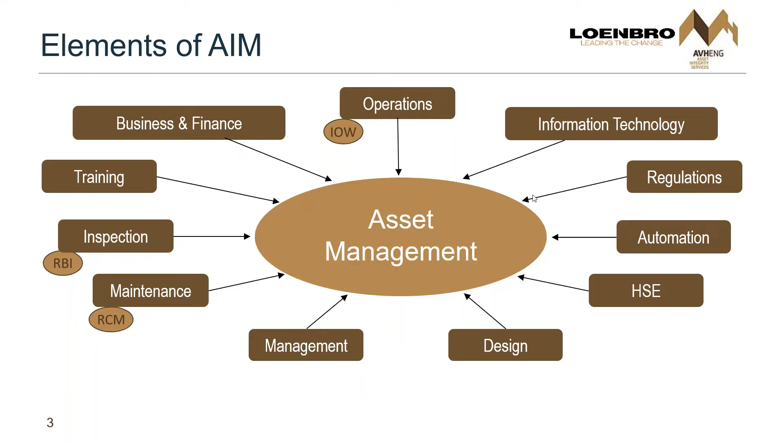What is it? RBI is a documented methodology, a thought process that factors risk into inspection and maintenance decision making. It's a hybrid technique which combines the disciplines of risk analysis and mechanical integrity. Typically in the industry, it only covers the breach of pressure containing hardware.

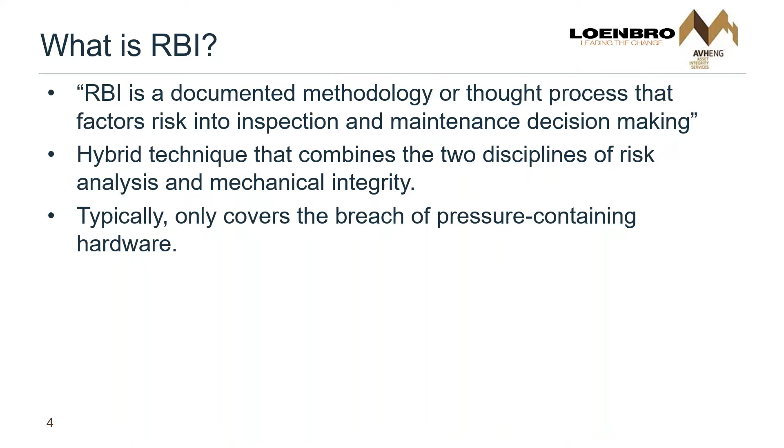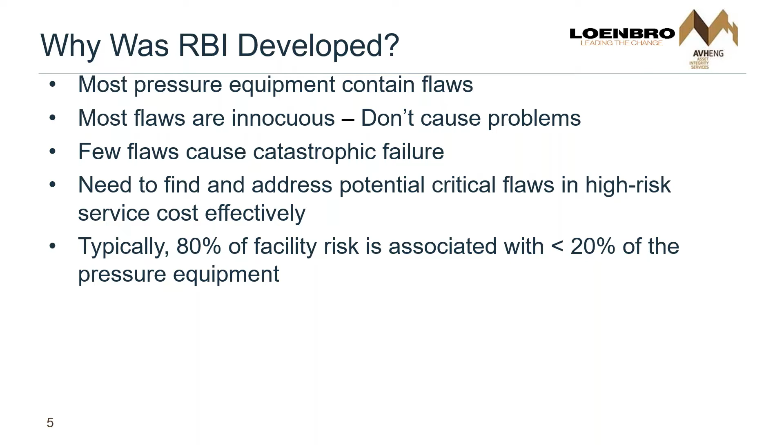Why was it developed? Most pressure equipment contains flaws, and those flaws don't cause problems. Most of them don't, but a few of them do, and can cause catastrophic failure. So the idea was to find and address potential critical flaws in high-risk service cost-effectively through a repeatable methodology. That's why RBI was developed. And as a matter of fact, if we look at a facility, a lot of times 80% of facility risk is associated with only 20% of the pressure equipment. So this allows us to concentrate on that 20%.

What are the typical objectives? Avoidance of catastrophic failure, getting a safer plant. Being able to attain longer intervals between internal inspections while maintaining the same level of risk. Focusing resources and effective use of inspection and maintenance personnel, documenting the methodology for factoring risks into inspection, and it's a proactive application of new technologies and allows for that.

That fourth bullet point is very important, primarily when one is going through a sustainment program, or if there's ever any kind of investigation of a fault or something like that. It's documented how the decisions were made to do, how often to do inspections, and so on.

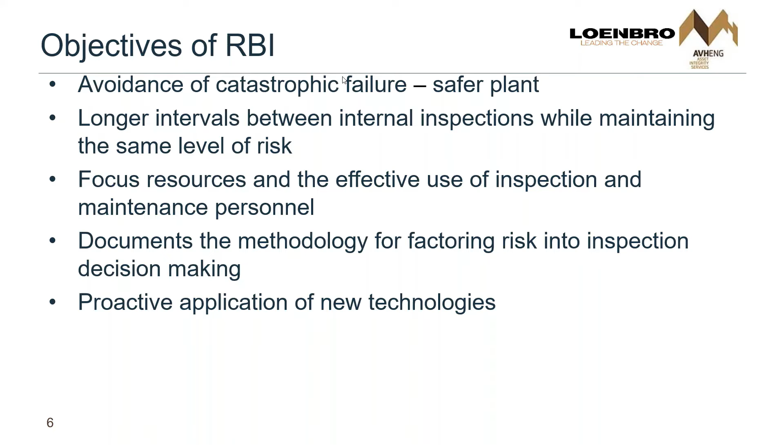There are three basic questions that are considered when establishing the basis for defining risk. They are: what can go wrong? How often might it happen, a likelihood, and what are the effects, the consequences?

A fairly easy understanding is risk is the combination of frequency of some event and the consequence of that event. So when we look at COVID risk, it's what is the frequency of being exposed, and what are the consequences. Or what's the risk in flying - it's the probability of the aircraft coming out of the air somehow, and we all know what the consequences are.

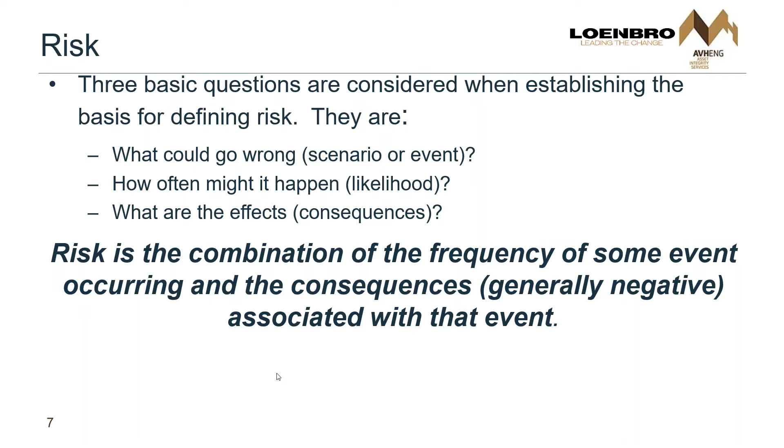Typical RBI implementation process: first of all, we have the preparation phase - determining our goals and objectives, assembling resources, determining our approach, and determining the scope. The next thing we go into is analysis,

or assessment, when we collect the data and determine the consequence of failure, likelihood of failure - that's what COF and LOF stand for - and do the risk ranking.

And then finally, we go into an implementation phase, which is basically taking the results from the assessment and developing inspection plans, or developing integrity operating windows, and maybe developing corrosion control documents, or CCDs.

There's also this other piece, but primarily that's a matter of if, after the risk assessment, it's found that the risk is too high to meet corporate requirements, then other changes may be required. In other words, some systems may have to be operated differently, or a design change may have to be implemented to keep that risk within acceptable levels, because inspection won't take care of it.

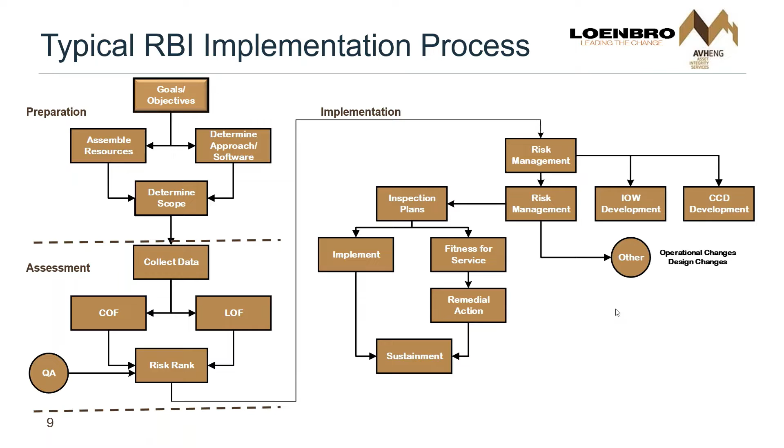Finally, the development of inspection plans: if there are no issues, you can go right ahead and implement it. If we find that there are some items that are way too high, or off the chart, we undertake a fitness for service and take remedial action. Then those plans need to be sustained by regularly updating your RBI process through the management of change.

Preparation phase. Goals and objectives - this goes through why are we doing it?

What knowledge is required? Who will be on the RBI team? What are the roles? Who's responsible and accountable for what? What facilities, assets, and components will be included? What approach, methodology, or software will be used?

What data are to be used? When will the assessment be completed? How long will the assessment be in effect, and when will it be updated? How will the results be used? What benefits will be derived from the program? So basically, when you're setting up a program, a lot of these need to be addressed, and some of these will be covered as we go forward.

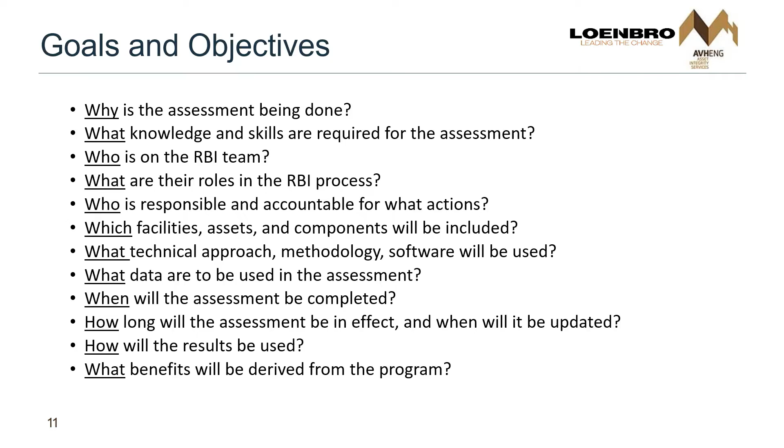Types of risk analysis - we've got a Level 1, which is basic. This is primarily in the oil and gas, chemical environment. Level 1, qualitative risk analysis, simple, brief prioritization of equipment.

You may easily use a spreadsheet with qualitative questions and rate items high, low, medium, what have you. This is usually developed by a group of corrosion engineers, process engineers, and inspectors to take a look at that.

Level 2 is a semi-quantitative risk analysis. It's more detailed in prioritization and planning. There's a way to rank things within there using subject matter experts - those with maybe 10 to 15 years experience working at plants who can understand damage mechanisms and contaminants that may be involved in process streams and so on and so forth.

And then finally, there's a quantitative risk analysis - basically in-depth analysis. This is typically implemented through software that provides for using the detail of the API RP 581 methodology.

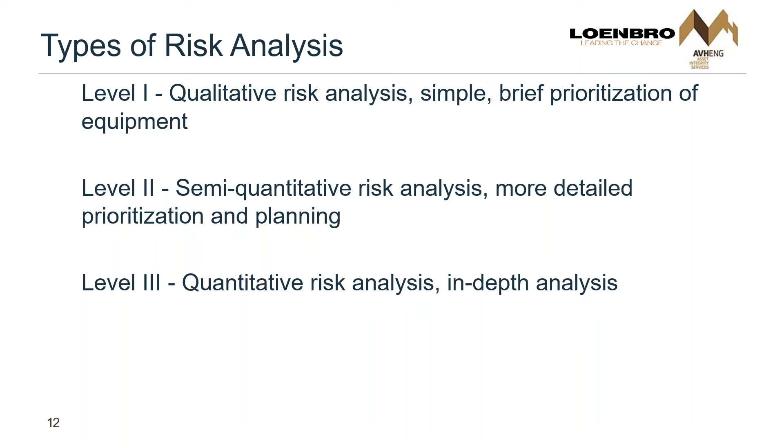Which one would we recommend that you use, or do you want to decide to use? We understand, perform the minimum level of analysis necessary to provide information adequate for decision making. If I'm looking at one or two pieces of equipment, a very small type of thing, qualitative will probably be more than sufficient.

But if you're going to do a detailed analysis, you're going to need software, etc., so you can get repeatable results. Detailed analysis, when not necessary, doesn't benefit the decision maker, but may inappropriately use resources which could have been spent reducing the risk. Also want to point out, accuracy and precision are not the same thing.

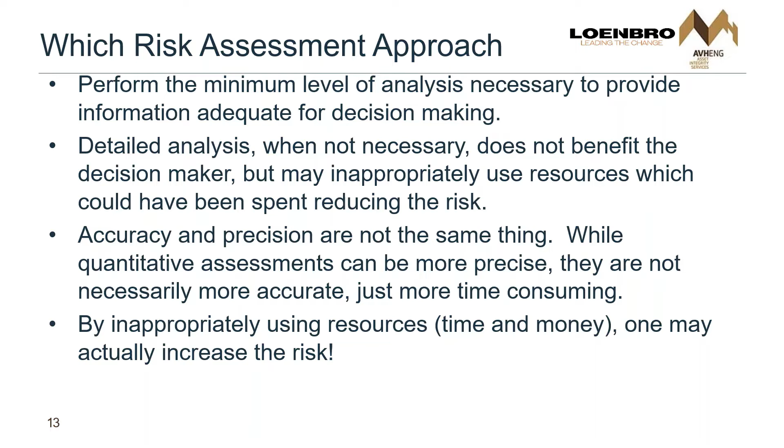While quantitative assessment can be more precise—I may find my probability of failure out to the second or third decimal place—I'll show you in a minute or two why it doesn't matter. Also, precisely defining the area your consequence is going to cover doesn't mean you need to be more precise. You can be accurate without being precise. By inappropriately using resources, time and money, you can actually increase the risk because you're taking away resources that could be used to manage the risk once it's done.

The approach in semi-quantitative analysis is basically to use weighted ranking factors for relative ranking centered on equipment and process-specific conditions. The quality of the data is taken into account. Component data are benchmarked and qualified, and the basis for all decisions is documented. I want to point out that's very important.

While the API 581 approaches take that into account, they also use generic industry data as a starting point in terms of probability of failure, and provide another piece of evidence to assist with the risk ranking. As you can see, we tend to favor the semi-quantitative approach.

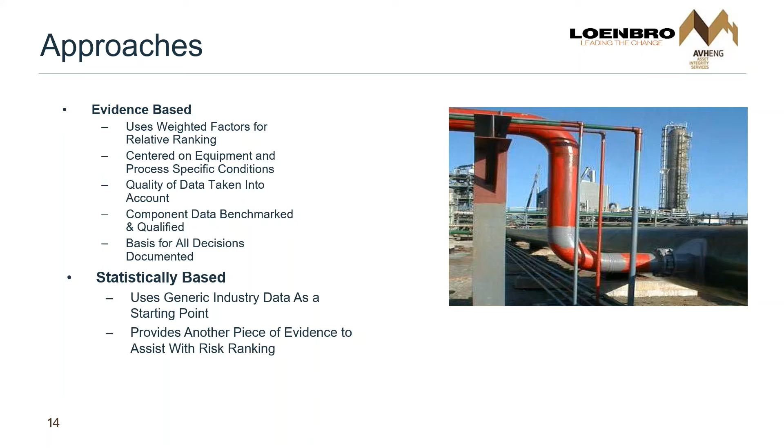The RBI software consideration: are you going to have the software be the IM program, or does it support the IM program? We certainly recommend that it support the IM program. There may be things within the software that don't address everything you need.

What are the requirements? You need to develop your requirements of what you want to do—quantitative, semi-quantitative, or qualitative? Do you want to include inspection planning and management? Is it going to be integrated with other tools such as SAP or other scheduling programs, your CMMS? What are the corporate IT requirements? Sometimes that can be, I'm probably speaking out of school, a pain in the neck. Also, what kind of training are you going to need to obtain?

Should you, as an owner user, obtain a license or have the vendor provide it? There are cost considerations when it comes to that. We always suggest that the owner user obtain a license, to keep being able to support it after the initial RBI is accomplished, in terms of sustainment. The other thing that can affect your license cost is to try to avoid bells and whistles—there's a lot of RBI software out there that has a lot more than you need.

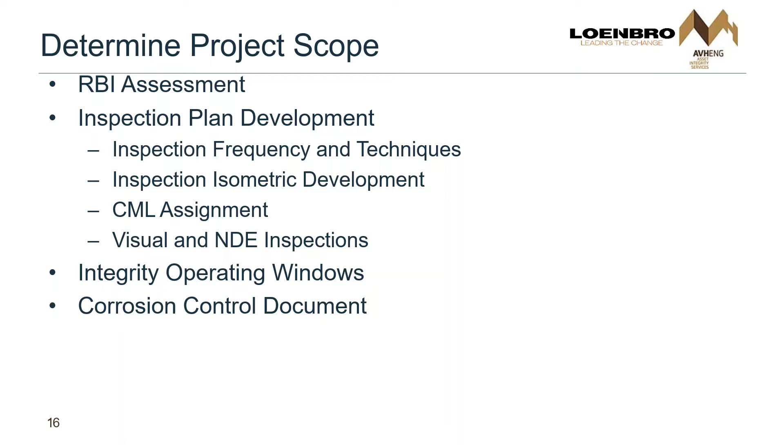Do I want to develop integrity operating windows, and do I want to develop corrosion control documents for documenting the RBI? What coverage—what type of units am I going to be looking at? Just the process, or do I include the utilities? Fixed equipment, piping circuits—those are normally included, plus PRDs, pressure relief devices, and/or 650 tanks.

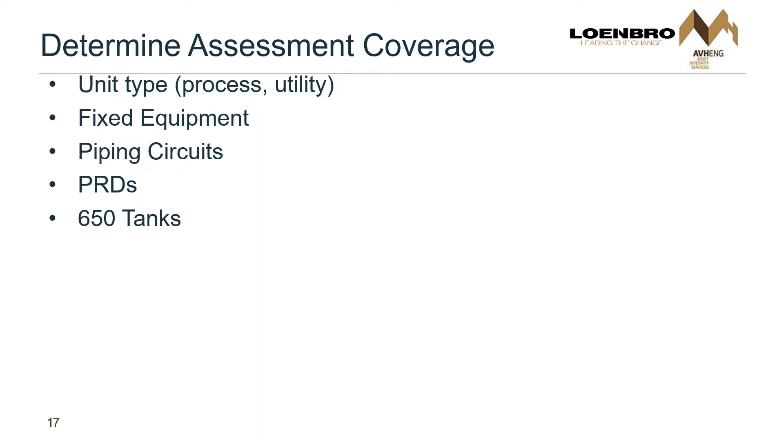Preparation and setting up the team process: who's going to be on there—project manager, data clerks, reliability and operations engineers, metallurgical and corrosion engineers. Oh yeah, we've got the process engineer too—I tend to forget to bring them in. A lot of the RBI is driven by metallurgists and corrosion engineers, just as an aside.

Cost is typically priced per equipment item, and we have a metric to determine the number of circuits based on the number of vessels or fixed equipment items we're going to be looking at. What is the software going to cost? And time—how long is it going to take to get it done? This is very size dependent, and dependent on the availability to gather and enter required mechanical, process, and other data.

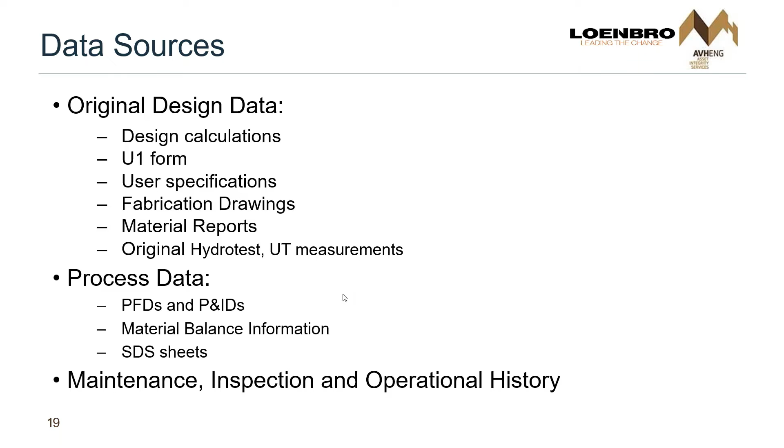We can also get a lot of good information from SDS sheets, or - I've forgotten it, you can look at the safety data sheets. And then, of course, maintenance, inspection, and operational history are all very important that allow us to get information to do what needs to be done.

Okay, the assessment process. First of all, we review the documents that we have picked up to pull out the information. And typically we'll take that data and have it entered into software templates to populate the RBI software. We start with the COF process, consequence of failure process, followed by the likelihood of failure process.

In the consequence of failure process, which we're doing using software typically, we go through and determine various and sundry things affecting the process - looking at the process material, temperatures, pressures - and then trying to determine the release and what type, calculate an initial rating, which is usually algorithms buried within the software, to see how bad my consequence may be.

API 581 measures it in an area and/or dollars lost, if you want to. And then the next thing to do is identify those things that can modify the consequence value, either up or down - it may aggravate it, it may mitigate it - and then come up with a final COF.

Right after that, we'll review the facility - usually have a subject matter expert who's got a wide range of experience. We have one guy that's got almost 40 years of experience doing this. He can look at the material of construction and the process fluids and make a decision on what damage mechanism. In fact, he can probably do that in about 5, maybe max 10 minutes. He's got that kind of encyclopedic knowledge.

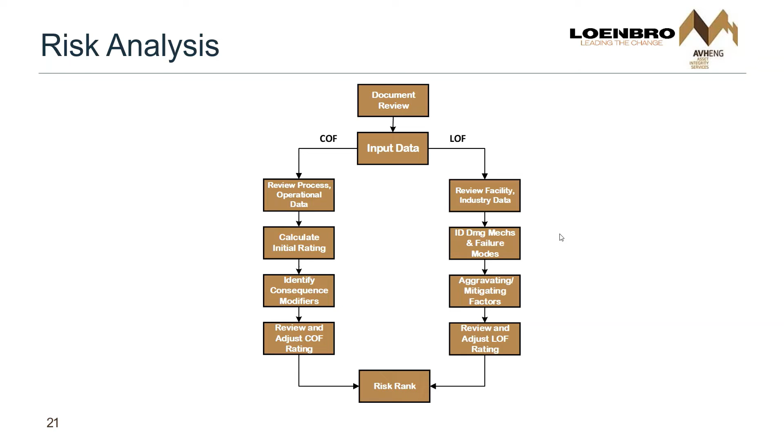COF data that we get - process chemical safety data sheets, as I was saying. There's one software that we're aware of that uses the National Fire Protection Association ratings, which if you've ever been out and seen on trucks a lot of times, or on oxygen tanks or something like that, you'll see a diamond with 4 different characteristics in there - one being flammability, toxicity, reactivity, what have you.

Okay, what is the density or the inventories that are going to be released? How much mass? What's the state - is it gas or is it liquid?

Confidence in the analysis - taking into account, has there been feedstock changes? This is probably more the oil and gas side of the business, especially if one was using sweet and they switch to sour, or vice versa.

Okay, let's look at the leak rate, which is tied to damage mechanisms - which means there's some damage mechanisms that will result in a total break, and there's others that will lead to a pinhole leak. Okay, what are the operating conditions?

Temperature, pressure. How many people, equipment, or buildings are in the area that could be impacted? What is the environmental impact - you know, the presence of streams, lakes, etc. nearby, that sort of thing.

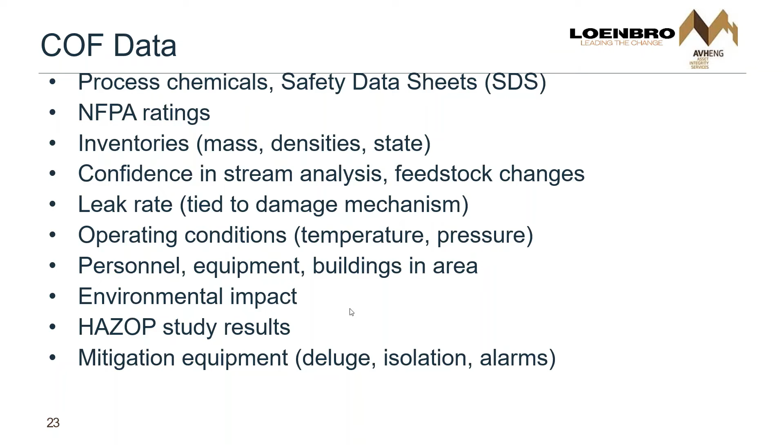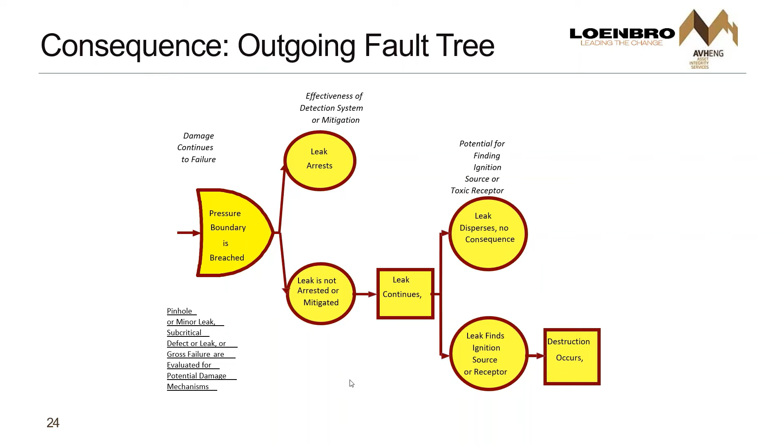The thought process here is more implicit than explicit. The idea is the pressure boundary is breached, and I can get two outcomes: I can arrest the leak and it's no longer a problem because we shut it down and had no leak. If it's not arrested or mitigated, it can continue. However, if it disperses, there's no consequence. On the other side, if it finds an ignition source or receptor, destruction occurs. That's the logical thought process, usually embedded in the software.

Now, likelihood of failure analysis. We define the damage potential, looking at materials of construction history, and the process streams and containment composition. We're not only looking at internal corrosion, but also external damage mechanisms. We identify the failure mechanisms, determine the potential failure modes for the damage mechanisms, and assign a damage rank based on the possibility of occurrence and the failure mode if it's not detected.

We try to define the damage potential. This repeats the previous slides, but again, we're looking at the MOC - how old is it? What kind of history and inspection data do I have? Is the inspection data showing an increasing trend, maybe an increasing corrosion rate or higher potential for a cracking mechanism? What is the process stream's contaminants and composition? If I've got a sour stream, that's really going to impact my potential corrosion rates.

Identify again the potential damage mechanisms. We typically use those listed in API 571 or API 581, but that doesn't mean you cannot use those you've identified yourself. We basically look at corrosion rates, and if it's really tough, may suggest getting the results of a remaining useful life assessment - but I wouldn't do that unless the cost is worth the return. Then we decide the damage rank based on possibility of occurrence and the failure mode.

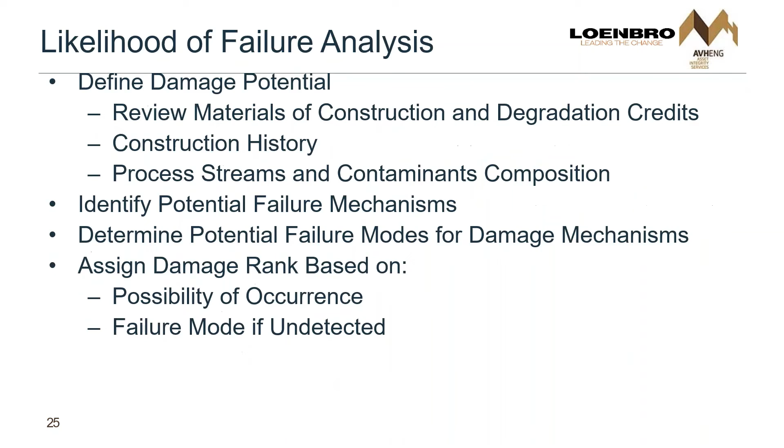Considerations when looking at the likelihood of failure: what type of corrosion control is underway? Is there any cathodic protection? What inhibitors are being used? Is the vessel or lines clad or lined? What are the process considerations? And had there been a process change, what have you.

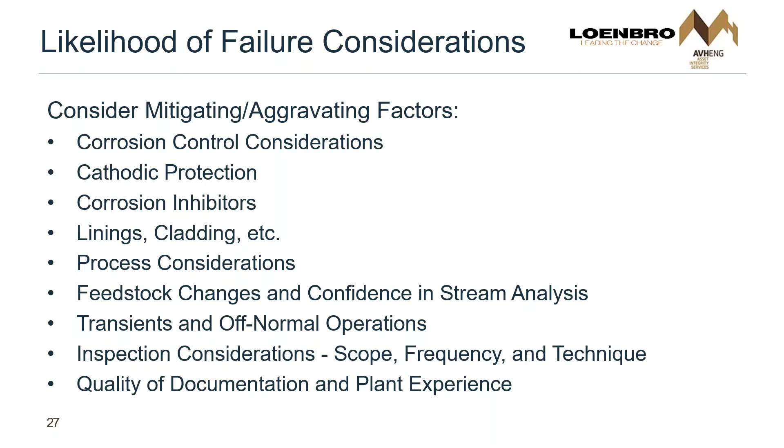Feedstock change, confidence in the stream analysis, transient and off-normal operations - we need to find out if the thing has been run hot or hard for various reasons. What's been the scope, frequency, and techniques used previously? Of course, if this is a green field, we don't really have to worry about that. And what is the quality of documentation and plant experience? We have had software that could sit there and address that and decrease or increase the POF, the likelihood of failure number.

Other failure factors: incorrect design from the get-go, incorrect material - somebody used carbon steel when they should have used stainless steel, and this may have happened after the plant was built, someone saying 'oh, here's a pup piece, I'll just put that in there.' This has happened before, and people have gotten in trouble because maybe a plant couldn't operate for six months because of an explosion or fire.

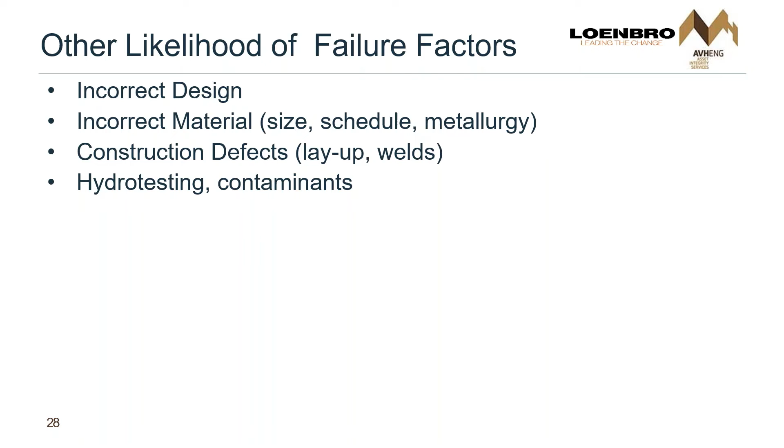Construction defects, layup, welds, and sometimes if they haven't been flushed correctly during startup, you can get junk causing problems. And then hydro testing contaminants.

When we're looking at risk and measurement of risk, the consequence of failure is usually set up as a business consequence - low, medium, or high - or damage consequence. The difference is damage consequence is usually in dollars, versus safety and health consequences. The damage consequence is more about what else has been ruined or affected. I was at one company where we did a post-fire damage assessment and had to go through and do some fitness for service assessments before they could start up again.

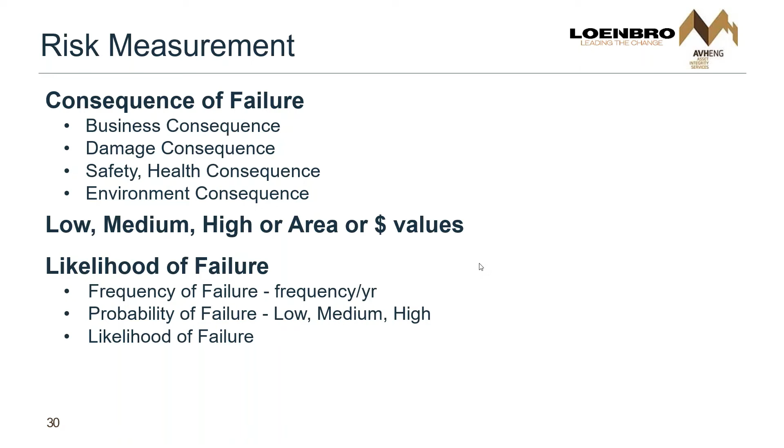Okay, what are the safety, health consequences and what are the environmental consequences? Again, like I was saying, they're usually determined in terms of low, medium, high, or in terms of an area such as API 581 or dollar values. The likelihood of failure is usually measured either in frequency per year, low, medium, high, or we'll be taking the frequency and converting it to a likelihood of failure.

Once we've done through all this, we end up getting our answers, whether it's semi-quant or quantitative, and putting it into a matrix. In other words, we determine if I have a low probability of failure and the consequence is nothing - I get a leak every 20 years, and what leaks is water condensate or something like that, it's no problem. But then we can go up to a very high risk where something is set up such that it can have a high consequence, a big explosion or a large toxic cloud, and a high probability of failure.

Typically we're going to be taking these results, and what we want to do is move this down, from the top right-hand corner down to the left hand bottom place. We want to try to get the risk down in either the yellow or green areas. These also don't have to be 5 by 5 - they can be set up to suit whatever the requirements of the owner user wishes for their corporate risk assessment.

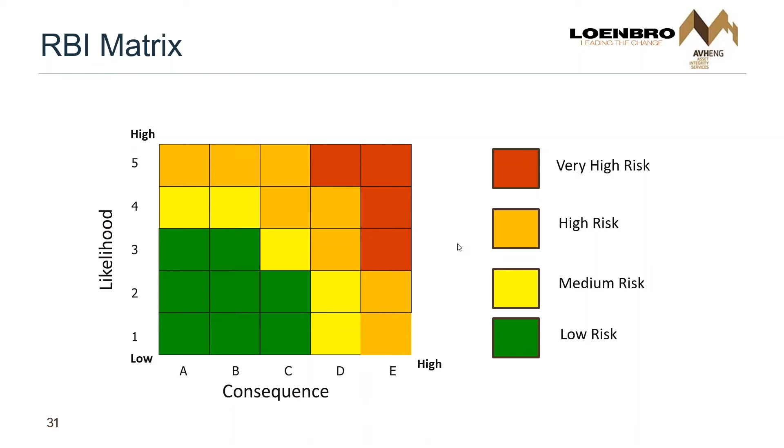The interesting thing is the API 581 approach will calculate the probability of failure based typically on generic data down to quite a few decimal places. And also if one uses their second level consequence approach, where you have to measure what the cloud distance or the probability of ignition is, all these other things still come up with these numbers, and they may be out to the second, third decimal place. They still go back and put them into a matrix just like this that are delimited by the values.

Okay, we've gone through, we've developed our risk ranking. What am I going to do with this? It's like doing RCM - hey, we did an RCM, well what did you do with it? In this case, as I'd mentioned, one of the key things coming out here is inspection planning. Identify the risk sensitive equipment, you prioritize it, identify likely damage mechanisms and the frequency.

And since we have that risk matrix, we can assign based on the COF and LOF maybe a recommended frequency. If it's really low, then I can have a quite extended time between inspections. If it's less, then we do that. But now once I've got that, I can output for each piece of equipment or circuit how often I'm going to inspect these. Within the software, you can set it up to have it align with, at least for internal inspection, your turnarounds.

The other thing is, because we're going through and identifying the damage mechanisms, we can associate different inspection techniques with the damage mechanism, such that the inspections recommended can meet the needs or have the highest likelihood of detecting potential degradation. And from that you can get a specific plan for each item.

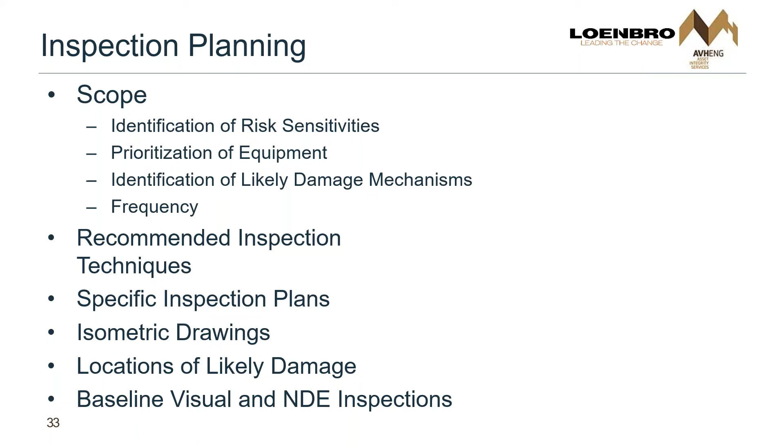One of the other outputs we were looking at, and we have found that this can be quite useful, is to develop a corrosion control document. It basically supplies information coming in from a lot of different areas where, if it wasn't done, the inspector or whoever has to go to a number of different documents. What this does is, because we're looking at all the different information sources, you get a system flow narrative, you get the controls, you get an idea of what the system information is, which vessels are included, which circuits are included, and what was the damage mechanisms assigned.

Recap the system parameters, chemistry, contaminants, a listing of the primary damage mechanisms, a discussion of the appropriateness of material selections, and appropriate inspection techniques for identifying damage mechanisms. A lot of this is covered in API 970, but in general it's been laid out, as opposed to providing a specific format for exactly what should be included.

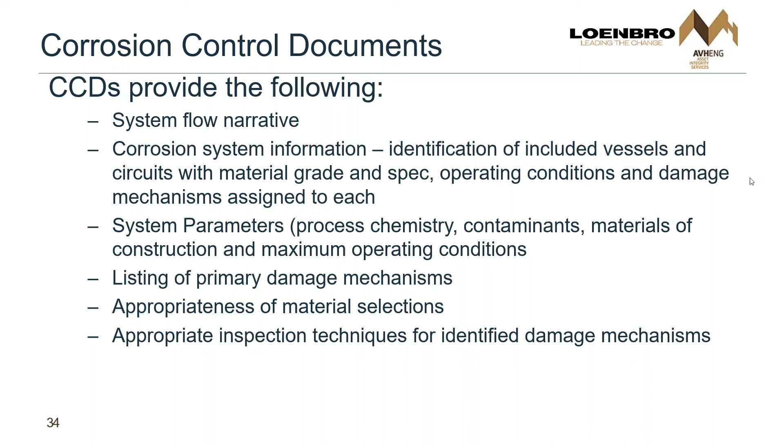Finally, IOWs. What is an integrity operating window? It defines the maximum and minimum operating process variables that should be maintained in order to meet the intended design life. In other words, I want to run inside a pressure, temperature, flow rate regime that'll keep me within the green, with values on the sensors that shouldn't be overridden.

Now, we know that sometimes they do get overridden, and you'll get into what we call the yellow zone, which is you're still within a safe operating limit, but when you get up to the red, you're even going beyond the design envelope. The idea is to get information from sensors and or from walkarounds, on a weekly or daily basis.

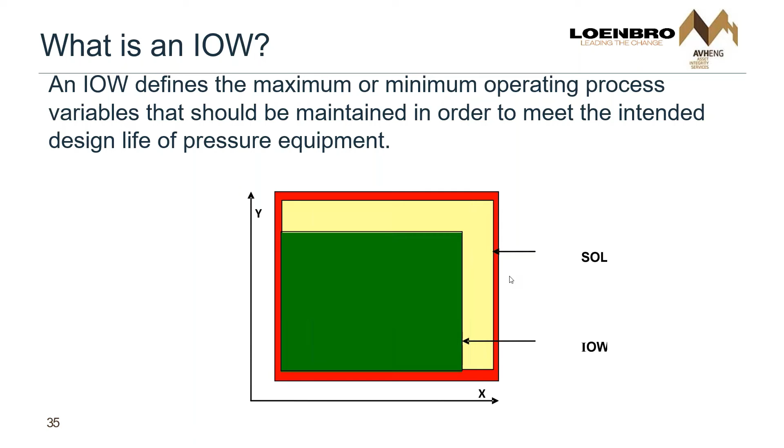That's how you gain that information. The reason it's needed is, what we're doing when we do RBIs, we're taking a snapshot. What IOWs allow you to do is get a running idea that you're running within the parameters that don't cause a damage mechanism to start, or exacerbate one that's already there. And you're sometimes getting real-time information on that.

When we say real time, in essence, one will take information from the sensors that leads down to the DCS, and depending on the criticality, it can either alarm and or just pass through to the DCS. Careful study has to be made of what it is, and then you have a means for, on an exception basis, an integrity engineer to go in and say, wait a minute, this happened, we need to change something and go from there, because this is potentially what this could have done.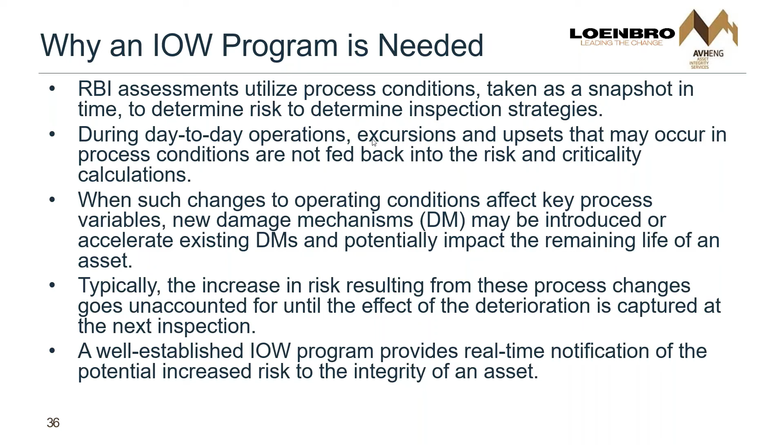We've also found it's a good way to provide information, and a good means of communicating between ops, engineering, and maintenance based on a common set of concepts and definitions, ending the problem of operations saying you didn't fix it right, and inspection saying you need to quit running that stuff the wrong way, so that there's understanding on both sides.

It's an established process for recognizing and mitigating the effects of operating plant equipment. They facilitate automated data analysis, eliminating the need to manually review an asset's past operating history. And they can provide real-time notifications of any predefined boundaries approaching dangerous territory, again by alarming that maybe out of the DCS.

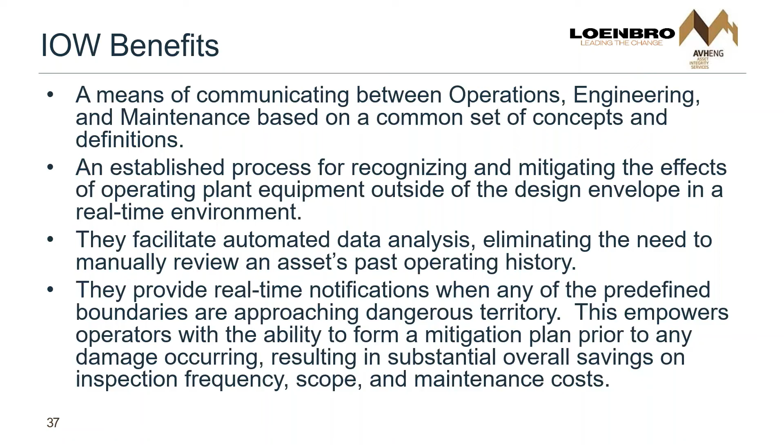Where can RBI and IOWs be applied? If you're looking at infrastructure, it's at process plants, including upgraders, oil processing, refineries, chemical plants. We've done it on pipelines, at power plants, typically on fired heaters, boilers, and even on offshore platforms. And what's included? Pressure vessels, piping, tanks, pressure relief devices.

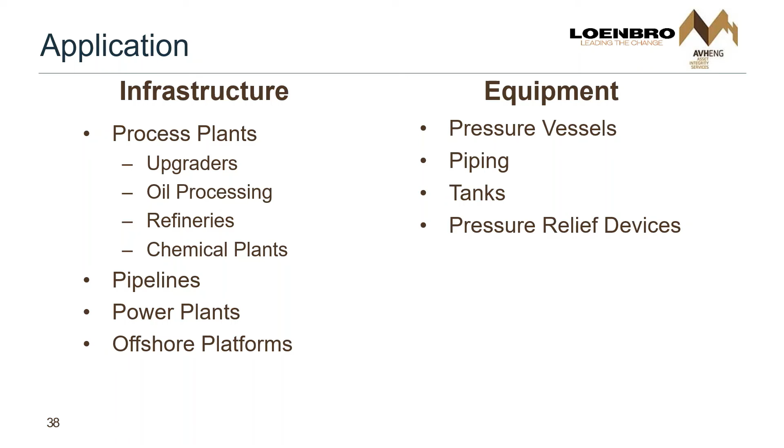Now the benefits. There's two pages here of what I would call non-dollar benefits. Regulatory compliance - this is how RBI got started back in the early 1990s, when OSHA came out and said thou shalt do thus and so. Improve safety, reduce risk. There are long-term cost benefits, and I'll show you an example here in a minute. It focuses the inspection - more than likely, it'll reduce your CMLs.

Extending intervals can be used to extend intervals beyond the API 510, 570, 653, and 576 boundaries. The opportunity to reduce internal inspections, not only by extending the interval between inspections, but also by smartly looking to see if the rules surrounding doing online inspection in lieu of internal can be applied. They can help with turnaround planning by reducing the number of items that may have to be inspected internally on a turnaround basis. The use of new inspection NDE technology leads to informed, documented, and defensible decisions.

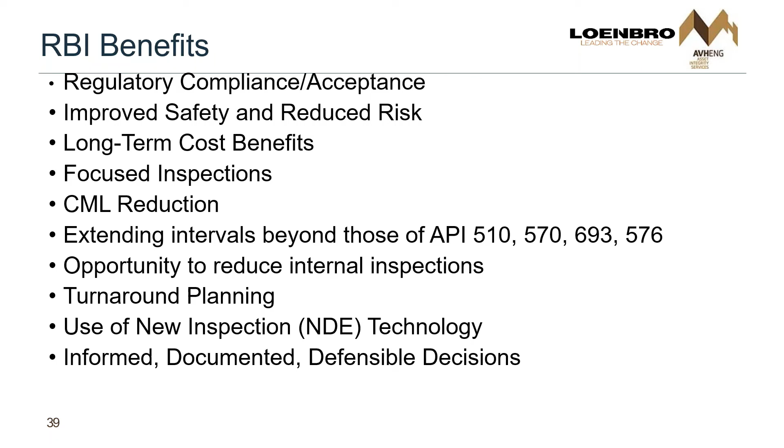Again, I can't emphasize that documentation enough. You can avoid catastrophic failure. When you're looking at the turnaround impacts, the turnaround interval can be increased, if it's not being driven by some other reason.

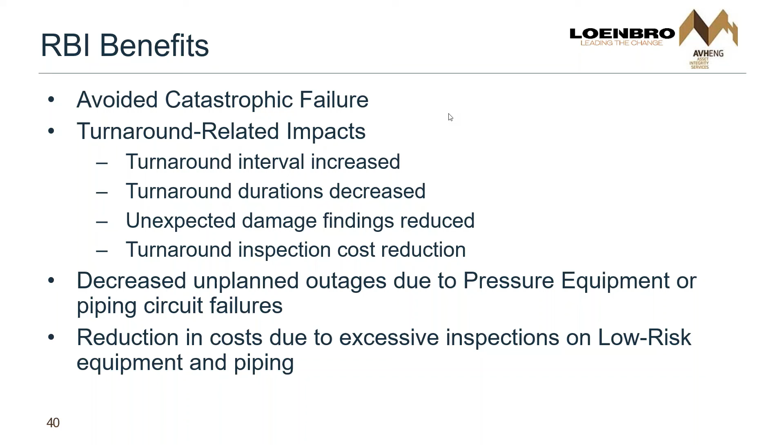A catalyst change or what have you. And if the turnarounds have been driven by issues with fixed equipment, potentially turnaround durations can be decreased because you just don't have to look at as much equipment. Unexpected damage findings may be reduced, especially if one takes into account IOW information, along with a turnaround inspection cost reduction, decreased unplanned outages due to pressure equipment or piping circuit failures, and reduction in cost due to excessive inspections of low risk items.

Now, these cost savings are real, and at one time or another each one of us in our various professional lives have seen this. Take this chemical plant, the turnaround cycle went from 4 to 6 years, a savings of $11 million every 2 years. This was in the state of Tennessee, which had a mandated requirement to do it every 2 years, and they were able to convince the regulating authority that doing an RBI, they were not increasing any risk.

Doing an RBI evaluation of a gas plant, turnaround time was shortened by 10 days, saving $10 million every turnaround cycle. For an ethylene oxide unit, 80% of vessels are now inspected at greater than 10 years, rather than having to do everything on 5. For an ethylene unit, the results of the study resulted in greater than $1 million savings on a turnaround. And for this alcohol unit, a study of 500 turnaround vessels and 500 PRDs resulted in greater than $500,000 savings on the first turnaround right after the RBI.

As there used to be a senator from Illinois by the name of Everett Dirksen, his favorite saying was, '$1 billion here, $1 billion there, pretty soon it adds up to real money.' So we can see that this does it.